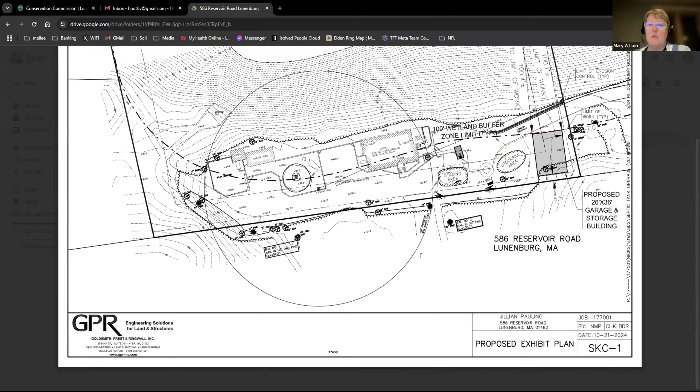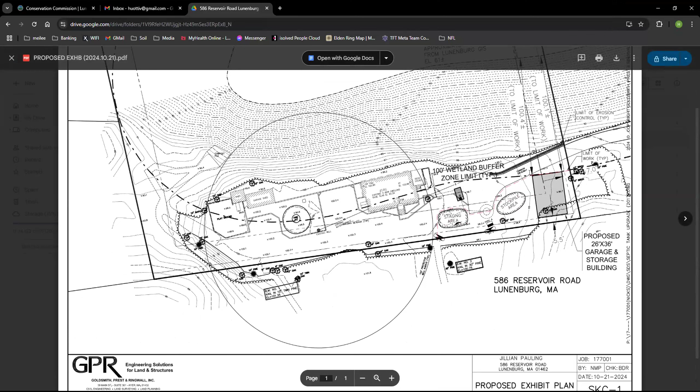So the subject site is an existing single-family dwelling, shown here at the top of essentially a hilltop that shares a common drive with the abutting property. The applicant is proposing to construct a new 26 by 36 garage slash storage building located right here at the corner lot. As you can see, this line right here is a 5-foot offset for garage building to the property line, and we have essentially placed this garage building 5.5 feet away from the property line, giving the contractor roughly 6 inches of play

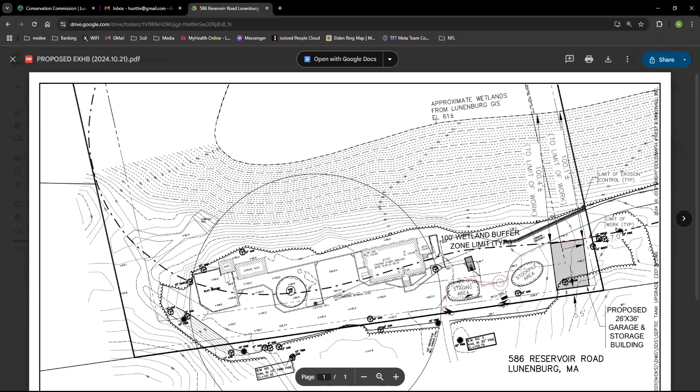for construction tolerance. In doing so, this new garage is set approximately just right outside of the 100-foot buffer to the large wetland area located down the slope on the northern side of the property. The building itself is set right outside of the buffer limit. Any staging as well as storage area will be done outside of the buffer limit itself. And we'll be installing erosion control on the down gradient end of the work. As I understand, during the site walk on Saturday, Bruce had answered most of the questions that you all had on site, but I'm happy to answer any more questions that you may have.

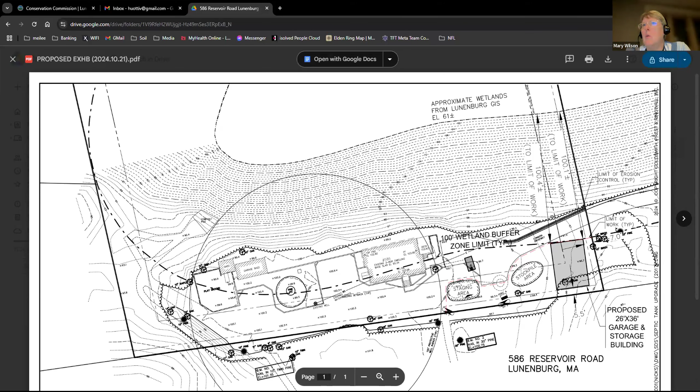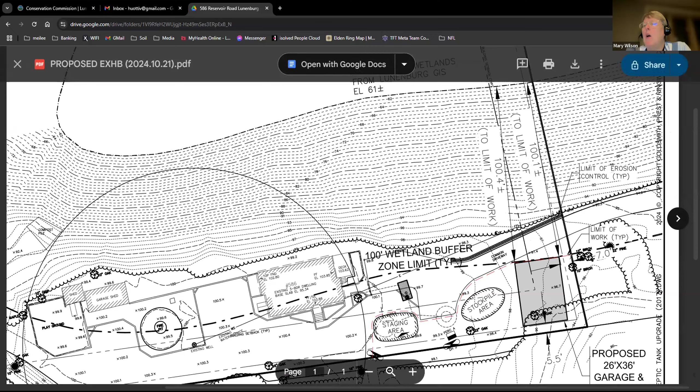Okay, thank you. As I understand it, there are 3 trees in that location that will have to come down, and those trees are outside of the 100-foot buffer zone. So I'd like to correct that mistake. There's actually 1 tree that's going to come down, not 3. This one here in particular. The 3 that Bruce was referencing are these 3, and they're actually placed outside of where the garage building is going up. Okay, thank you for that. But I also appreciate that you actually have that detail on your drawing. That's really helpful for us. I don't have further questions. I will open the opportunity for other conservation commissioners to ask questions.

And it looks like we don't have any questions from other conservation commissioners, which is a little bit unusual. Yes, Jenny. Where it's not in the buffer zone at all, is it even in our jurisdiction? It does look like it's outside of the buffer zone area. But it looks like the limit of work is actually inside the buffer zone. So I would say technically it is, but in my opinion, that's a gray area. I don't know if Rich has a different opinion there. He's the guy that's been around the block a little bit more than I have.

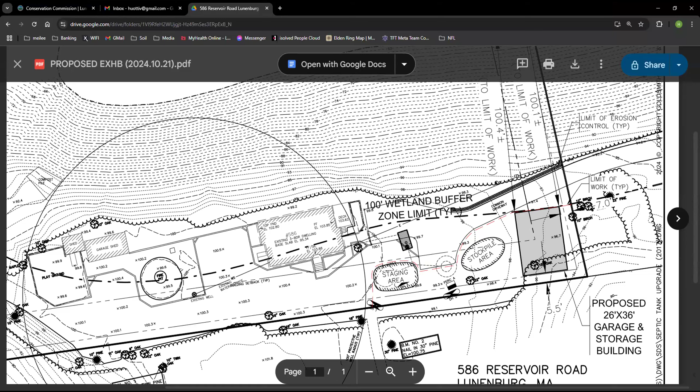And I was looking at the narrative on OpenGov, and you're right, they can't go behind, because it's only 5.5 feet, so there's not much area behind. Yep. So there's going to have to be stuff happening in the front. But the narrative says limit of work, stockpile, and staging areas will be located outside of the 100-foot buffer zone. So I don't know how that would be possible where it's right at the 100-foot.

That's a great point. I think the narrative is, I would say, incorrect. I think you're right, 100%. Getting access to the construction area, even just working on the building, is going to need a little bit of space right in front. Obviously, that's why we made the filing. But yeah, you're right. There needs to be a correction made to the narrative.

So, Tiv, would it be within your expectation that the limit of work would be expanded to be where the erosion controls are and looped around to be inclusive of the staging area and the working area around the staging area? Right. I think more specifically for the stockpile area, I don't believe that there's a whole lot of grading that needs to be done for the construction of this building. I would say that the grading associated with it is probably very minimal.

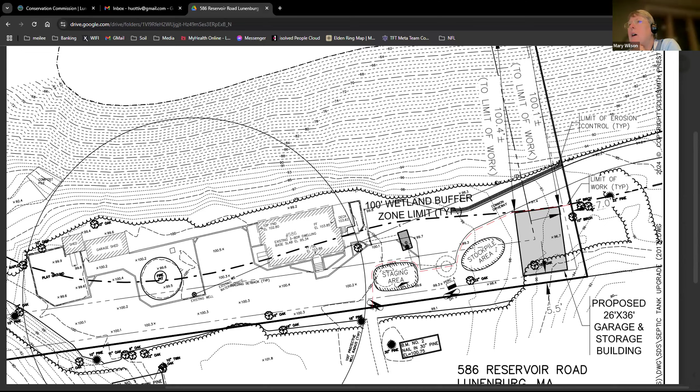And to my conservation commissioners, would you be... actually, Tiv, do you have the ability of marking this up? Yes, I do. Could you mark it up live right now and show us where you would put that limit of work? Let's see here. So it does show this red lining if you're following my cursor. It seems like that is being called out as the limit of work, but I think this line would actually extend to right about here and then wrapping down to roughly around here, and then closing in right there. That'd be the extent of it.

But even the staging area, presumably you're gonna have heavy equipment getting in there, moving trusses in and out or something, right? Mhm. Siding. Yeah. I'll tell you what. Why don't you get back to your team and revise it to where the equipment actually is going to move, and then resubmit that. Would anybody on the commission want to see anything different or additional or have any other questions regarding this, so that if we do continue it, they can come back with a fully complete proposal? Rich?

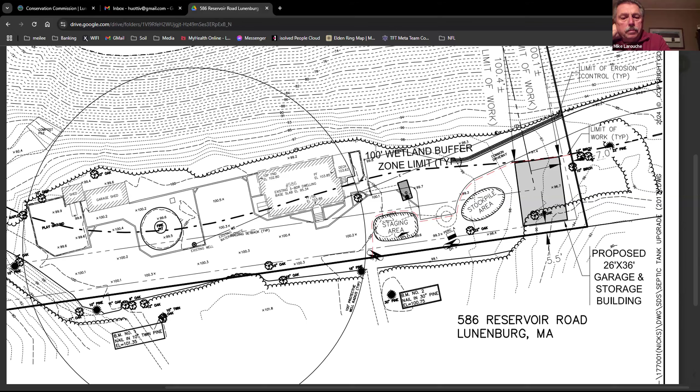Do I have a motion? So moved. Thank you. And do I have a second? Second. Thank you. Roll call vote. Chris St. Germain, aye. Mike LaRouche, aye. Rich Birsch, aye. Jenny Putherer, aye. And aye for myself. Thank you. Have a good night. Thank you.

I was just scanning our attendees to see for our applicants. I don't see any of our appointments logging on yet, so I think we'll move on to the next new hearing.

Pursuant to Mass General Law, Chapter 131, Section 40, as amended, and the Town of Lunenburg Wetlands Protection and Municipal Bylaws, a public hearing on a request to amend an order of resource area delineation by Christopher Anderson to remove a portion of the resource area delineation from the order due to maintenance performed on a man-made detention basin at 400 Leominster Shirley Road. And do we have that applicant and or their representative here on the call tonight? Yes. Bill Hannigan, Hannigan Engineering. Okay, thank you. Do you have plans that you can share with us? Absolutely.

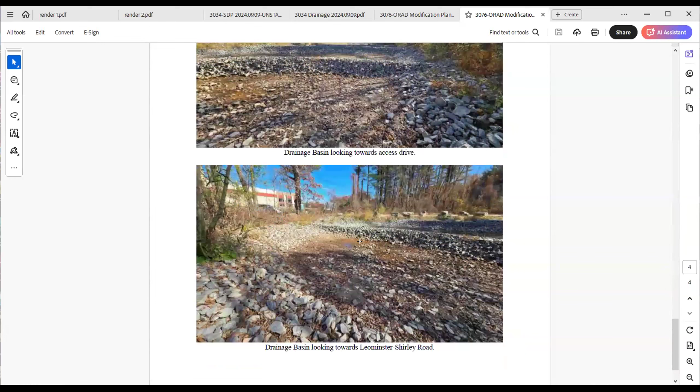And on the other side of the drainage basin area, right about in this location right here, if you can see my cursor on the screen, there's a culvert. And on the plans, that culvert is shown right in here. So their EPA requirement is that they have to test on this side of the culvert, the outlet of the culvert, every quarter, and provide results to the EPA.

Okay, so rebuilding of this detention basin or drainage structure, if you will, kind of basically eliminates this D series of wetlands. And the reason why we went out and walked it with Sophia, and when we looked at this area, when we filed our ANRAD, this area looked very much like this area, all overgrown with brush and brambles. And we did not know, and Keating did not reveal to us that was part of their operational system.

So when we went through and had this area delineated, the idea was, looks like a wetland. There's water from across the street, water from the street goes into a pipe, goes into another wetland. There's our D series. Well, now with the introduction of this structure into that whole area, or a majority of that area, this kind of takes away from that D series wetland falling under the jurisdiction of the act and of the local bylaw. So what we're asking is that the order be amended to eliminate the D series of wetlands, which would then be consistent with what the commission granted for the Keating people to build.

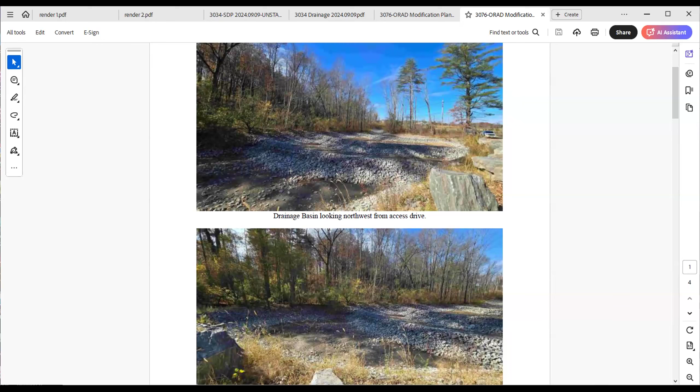So I'm just trying to wrap my head around this. So basically, Bill, the area you had surrounded in blue was a wetland, and you're trying to get it re-delineated as a drainage structure, so it would not have the buffer zone attached. Is that where we're going with this? Well, it's not that. We said it was a wetland. Yep. The commission, by issuing the RDA to Keating, essentially said it was not a wetland because of the fact that they allowed that drainage basin to be rebuilt under a -2.

So they even said in it that the work is not within the buffer, it's in the buffer zone of jurisdictional area. So the buffer zone, I would presume, would be from across the other side of the access path. Okay. So what we could do, if we agree on all this, is submit a new plan as a follow-up to basically take the D series off and redraw the buffer zones on the other side, so that plan becomes the updated plan for the project, so that we all have a record that we're working with. If that's acceptable, I think that would make sense.

And since I'm not going to get a chance to do a site visit, is it something you can present the draft with the changes you're requesting before we approve it? The change I'm requesting is to eliminate this. All I'm going to do is update the buffer zones to be relative to just this wetland system versus both of them. That's not really a significant change. This system will then have its own buffer zone coming around this way. But I could do the same thing as the previous one. I can get you the plans prior to Sophia issuing the amended ORAD. No problem with that. Okay.

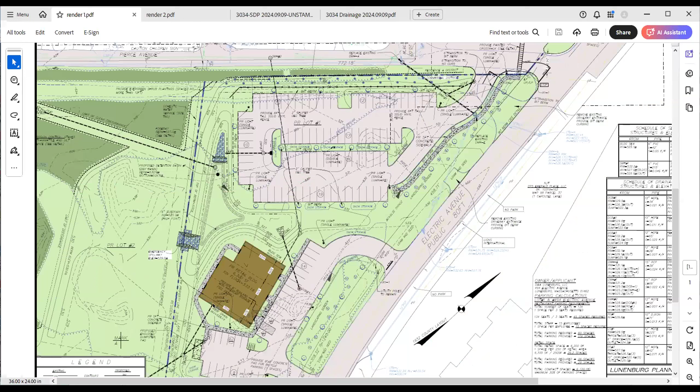The second part is that there's a proposed retail office building that would be constructed that would have its own separate parking lot off of Electric Avenue. The stormwater system would then drain to a dry detention basin in this location here with some of the stormwater flows coming from each of the parking lots. And then on the second page, the roof drain and one piece of the parking from this area here would go down into a grass-lined swale to an infiltration basin down in this location here.

Another set of piping from the detention basin would be outflowing here down to this channel that eventually gets to the wetlands. So the drainage analysis report once again shows that the peak rates of runoff are mitigated. It is partial redevelopment on the project, but I believe, and I'd have to check in detail, that the project meets the stormwater management requirements. Chris Anderson did most of the work on this one.

There is availability for building lots in here. The drainage system has been designed to accommodate the three houses that would be built in this area, along with their driveways and impervious areas and change in land use associated with that. So we've kind of thought ahead about getting that into the drainage system, so the calculations are appropriate for that in the future. But we're not proposing that work right now.

So DEP sent out some comments, which we've taken a stab at reviewing initially. There were really only three comments. The first comment was about the TSS worksheet, that the treatment trains include water quality units. The water quality units are within the drainage calculations, but they're not properly depicted on the plans. So we're going to update the plans to actually call out which structures have water quality units in them, so that the contractor will know which ones to buy.

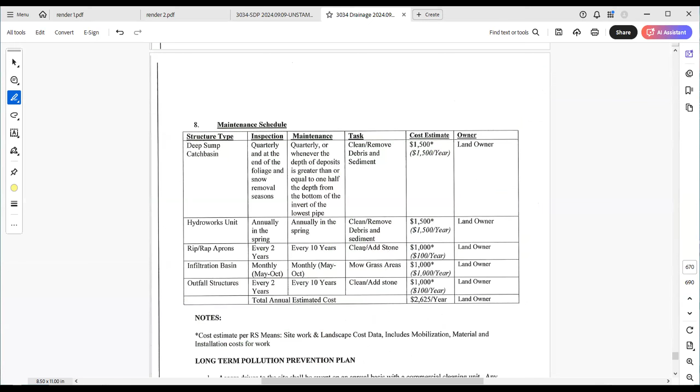And then the O&M plan, there's a dry detention basin, which is the detention basin towards the front of the site. This detention basin right in here, and we need to add a maintenance section for that, along with pricing or cost estimate of what it's going to cost to maintain that, and that's this table right here. We have the different units. We have the infiltration basin, but we don't have the detention basin, so we'll add that as well. So those are pretty much the comments for now.

As I stated, most of the work that is in the buffer zone is really related to this grading and this drainage system. When we do go back to build a house on this particular lot, wherever it may be, we would have to file a separate notice of intent for that work, because that work is not included within this filing. So that would be a separate notice of intent that would be filed, but the impacts from that are included within the overall analysis for the stormwater system for the whole project, as part of what we did in the drainage analysis.

So if you have a couple questions, we can kind of go through them real quick. But as I stated, we are anticipating requesting a continuance for this project. Bill, I'm primarily interested in the jurisdictional area, right? Which would be towards the western side of this parcel? Yeah. What brush cover, tree cover is going to remain, and what is going to be impacted in this proposed plan?

Well, under this plan right now, this is the limit of our work. Well, actually, this is the limit of our work because this is going to remain the same, but we do have impacts that are going to be happening in here, which we've included for the purpose of the drainage analysis, but not for the purposes of the notice of intent. Okay, so maybe what we could do is provide you with an overlay plan that shows where those areas are, so you get a better feel of it.

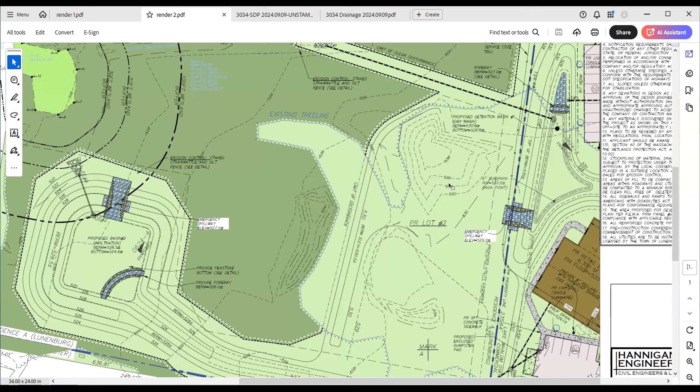Yep, limited disturbance, you can see. We have erosion control placed here. Now I can see erosion control around it here. Yeah. Okay, and then the erosion control comes in this way. So we have erosion control around all the areas that we will be disturbing, but we'll be basically building a berm in that area to basically push the water in the direction we want it to go as part of the drainage system.

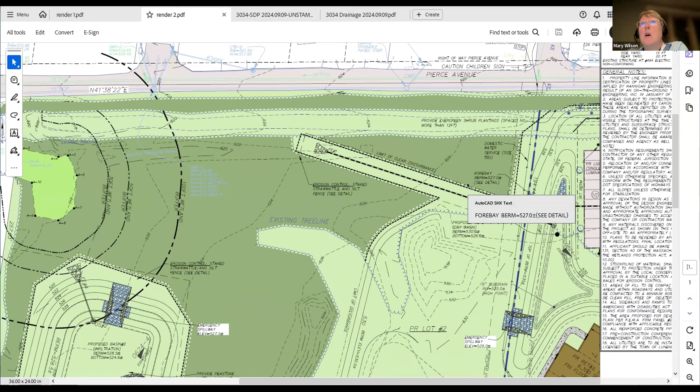Okay. Now, with that existing drainage ditch here, there's no work proposed in there? Not in this filing, no. One of the things I had noticed when I was out there walking the site this weekend is that the northernmost, where's north on this? North is... Okay, so the line goes northwest, right? Yeah. On the northwest side of the berm, for the drainage ditch, it looks like there's a lot of trash that's been built up in there, and so I wondered if that's just going to remain untouched.

We can clean that area up as part of this. I don't think there'll be any problem with you adding that as a condition, to clean up the trash in the existing drainage ditch. Yeah. And I think there may even be some trash areas along the outside of that as well. So this is apparently the old, I think it was part of the old F&L railway, like a railroad bed through this area here. So that's kind of littered with different things. He wants to clean it up anyways, but we told him we don't want him to touch anything until we get done with the process because we don't want him to get himself in trouble.

Yeah. So let's see here. I'm gonna try to, oh, it's not gonna let me do it. Can you see? You can't see my mouse on this. No. It's not as interactive as the ones that I use during my day job.

Where your mouse is, if you go up on the page to where it's dark green, and then follow that dark green along to the left, right? Mhm. All of that berm right there appears to just be trash, all kinds of trash with dirt mixed in, cinder blocks and construction trash. And so that was specifically the area I was thinking of. Okay, I thought you were talking back in here. Yeah, we were kind of talking around each other. But yeah, so that was my question. And it might be better if it's left undisturbed. But it was something that I certainly had noticed when I was out there.

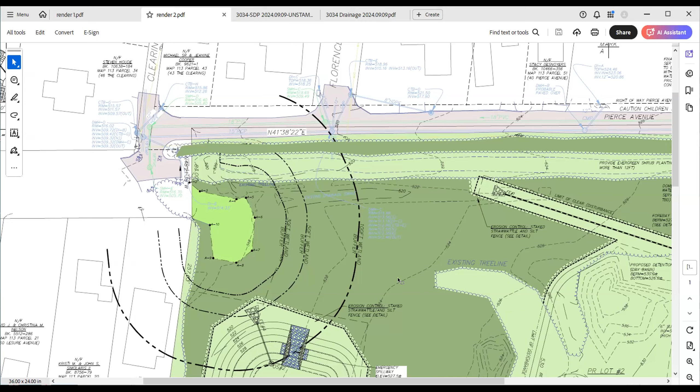Based upon the survey, it appears there must be larger trees and woodland type cover in that area. There definitely is, and it's pushed all in between. And I'm not asking for you to do anything. I just wanted to know what the intent was there. That's all. I think maybe not as part of this project, but I think the plan is for 3 single-family houses here, and as part of that plan, this would get cleaned up significantly and then most likely maintained by the landowners at that point in time. Okay. Thank you for entertaining that question.

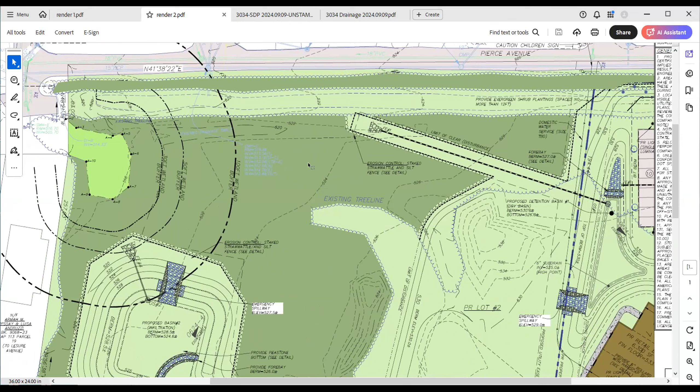Rich has his hand raised. Rich? Oh, hold on. Am I unmuted? Yes, you are. So it's not in our jurisdiction, but are they planning to do the parking lot and the commercial building at the same time? Yes, that's the plan. Okay. I just noticed that they didn't have the same entrances or any of that, so.

Yeah, I believe the intent is to build this one first and then build this one. They already have the desire to rent this out. They have interest in it already. I don't know exactly what his plan is. I think we'll probably find out more as we get through the process. But I know he wants to build the parking lot for the restaurant as soon as possible. He may do both at the same time. To me, it makes sense to prep the whole site at the same time, even if he doesn't build the building yet, and then he can come back. Okay, that's kind of where I was going.

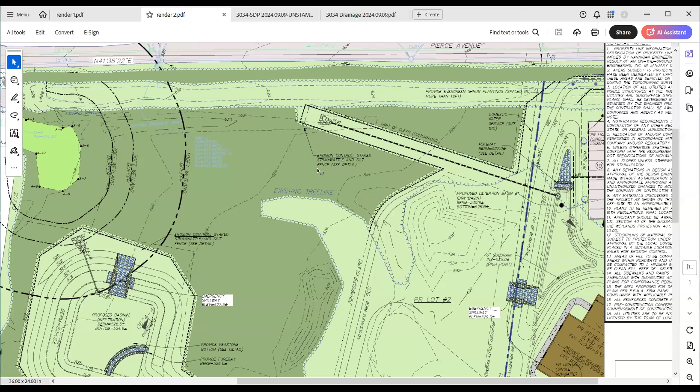To see if you were doing all of the wetland build out, even if they don't do the retail building right away. Right. Yeah, so I think what we can do is, between now and the next meeting, we can kind of take a look at it. I understand your question, because what your question is: is this going to get built first and then this not going to get built for a couple of years?

Okay. So it looks to me like the only thing really draining into this is this section right here. So I can talk to Chris about whether the overland flow from this area here is intended to go; looks like it's going to go this way anyways. So it may be that we don't need to build all of this until we're ready to build this. But once we start building

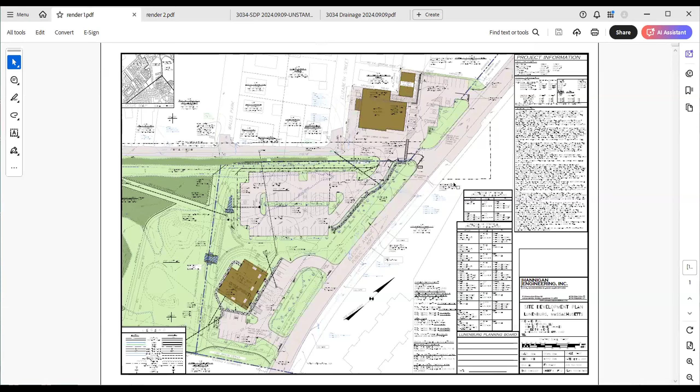from my perspective, from a construction management perspective, once we start building this parking lot, you got the site guys out there already. This sewer line has to come across here, so you're already kind of working in that area. You have to build this basin anyways to have the availability of drainage for this one. So this will get built. So I mean, it almost makes sense to have all the infrastructure in place, at least to this point, before you start building this area out.

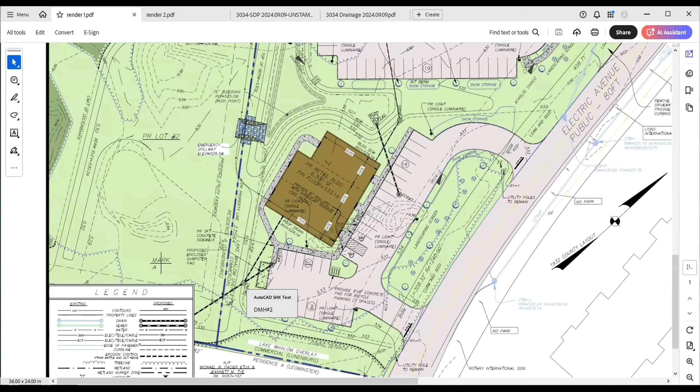And then from there, if they finish this basin and they finish this parking lot and they don't start the construction on this part of the site, there's really only two structures left to be put in and a roof drain. So from my perspective, I think it makes sense to put this stuff in probably up to the zoning line and then wait. And then when they go to build this, that's when they would build the rest of the stuff heading to the back. I think that would make sense to me. Okay.

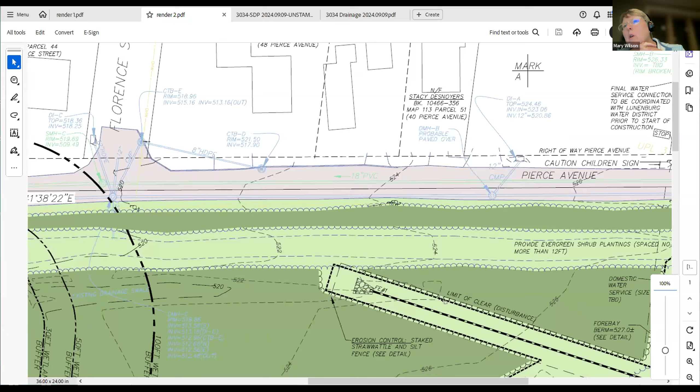Bill, where are the erosion controls going to be placed? And I zoomed in, you saw them. Yeah, right at the limit of work. Right, limit of work. That's the erosion control. Oh, okay. Is that straw wattle and a silt fence? I believe so, yeah. Okay, very good. Yeah, that note that you had zoomed in on said what it was. All right. Do we have any other questions from members of the commission? Okay, I'm not seeing any. Do we have any questions, comments from members of the public?

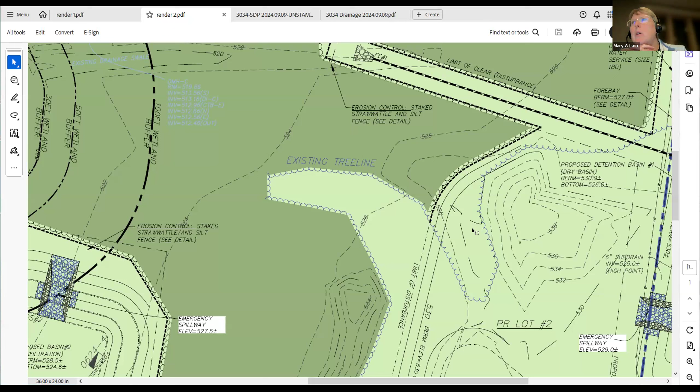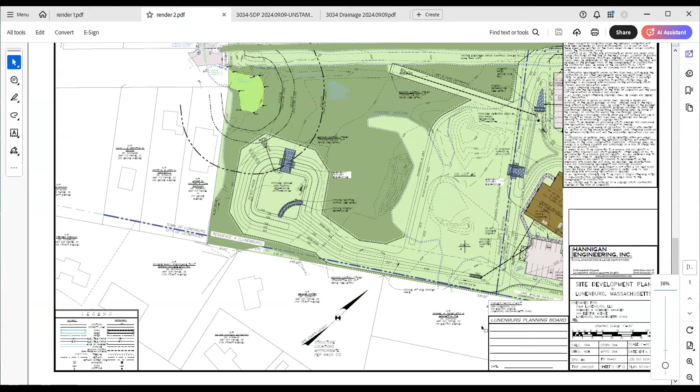Okay, Bill, I think you said that you were asking for a continuation? Yeah, I think it makes sense to let us get the peer review done, because if there are changes to the plan, then we can bring back and give you a revised plan that you can vote on, and then that revised plan will be the same plan for both planning and conservation. I think that makes the most sense. Okay, and so what date do you think we should be shooting for in terms of continuation? Our next meeting is the 18th? Yeah. Or do you think it's more January?

I think what we can do is, let me just, maybe we continue to the 18th, and if we don't have everything back by then, we can ask for a continuation ahead of the meeting at that point. Yeah, we can do that. And honestly, you can just notify Sophia by the 16th or 17th, right? And then even though we have you on the agenda, we can just announce the continuation, and our meetings in January are going to be off cycle.

They'll be on the 18th and what, 22nd? Is that right, Sophia? I think that's right. Well, you got one of them right. It would be the 22nd and the 8th, instead of the 18th. Yeah, I was looking at 8th. Oh, so the 8th and the 22nd, okay. But we have a request from the applicant to continue this to December 18th. Do I have a motion from the commission?

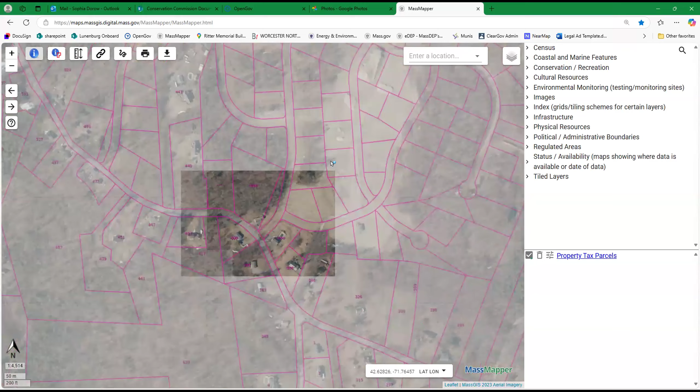So here's the property. Let me orient myself. This is where you come in. Correct. Usually we park over here. So Monday we walked a couple different ways down here. And this is where it starts getting really aggressive, and we noticed that Kevin put some new refreshed erosion dams, check dams or something, all the way down.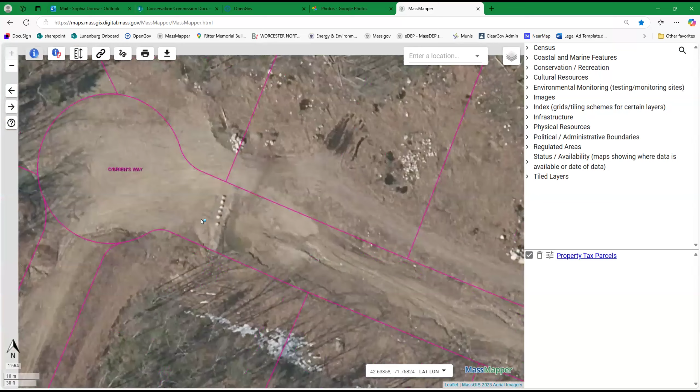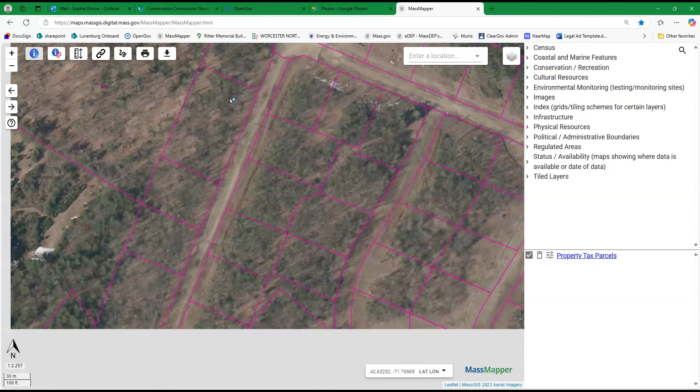And then there's like a basin that catches the majority of the runoff that's happening. But it's still bypassing that because it's not deep enough. This is kind of eroded away and it's just bypassing around and continuing down here. So if that's not addressed, all these check dams up here are kind of in vain because it just pools here and then overflows and continues down. And then I believe there were wetlands over here that the siltation was going into.

Hang on, slow down for a minute because there's like a delay. Oh, there is. Sorry. So where are the wetlands that you're identifying? Let's see. I believe in this general location, and that was quite some time ago that I knew they were there. Chris St. Germain was with me, and they were going down into that area where the wetlands are flagged previously.

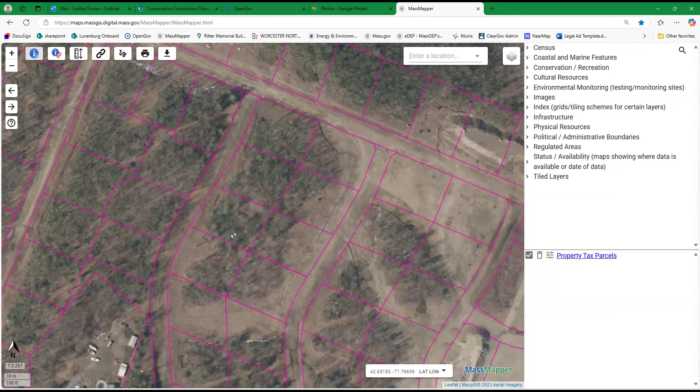Now slowly panning up this way. Another area of concern that we had not gone to until recently this week was this intersection here, where it mirrors the same exact thing as what was going on north from here, where all this open land just starts to funnel and create another crevasse-like channel that runs down. And there are the newer wetland flags along in here, in which the sediment goes directly through those flags. So not only within the buffer zone, but within the flags themselves.

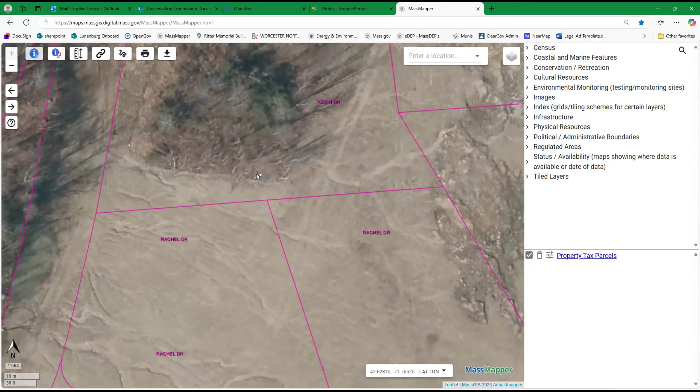And then furthermore, today we parked here and walked in. As you can kind of see, other various areas of sediment eroding down this way, down gradient into this location, and another one over here, and they're just kind of trailing off directly into this pond here.

Now I noticed that there were very, very fresh straw wattles and silt fences, a silt fence put up over here. However, it does not follow the wetland delineation flags. In fact, it goes through the wetland itself, which is not properly installed. So that's a concern there. I do have photos, and maybe while I share the photos, Chris can have more input.

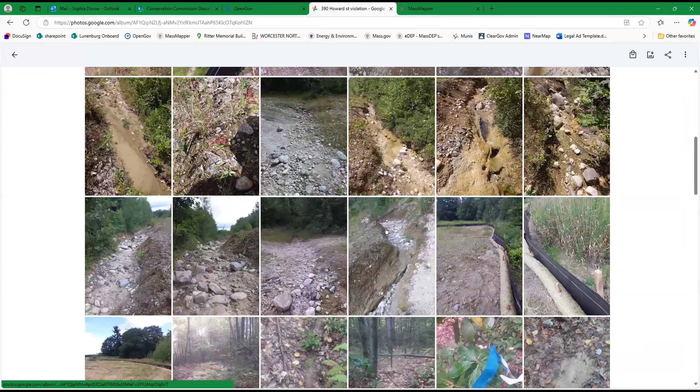Yeah, just basically echoing what Sophia said. So as we were walking down, I had never gone that far down that particular area, and we found some significant erosion. Like she said, it mirrors the original one, where it's a very steep downhill, and it just carries everything all the way down. So that needs to be addressed.

I find the property a little overwhelming in terms of, you know, trying to address issues. There's just a lot. Not really sure. I feel like I need more education in order to. I wish I was out there with the Ecotech folks. I would like to have a real expert out there to help me understand what can be done. I feel a lot of the issues are tough because there's so much missing forestation, and since the project hasn't started, the issues are just, you know, exponential.

Thank you, Chris. Sophia, why don't you narrate us through these photos? So this is the most recent erosion control. You could just tell it was really fresh, and there were still plastic ties left on the ground. But this runs straight through that pond area. I would say the wetland flagging, the blue flags, were probably like 20 feet to the left over here. So completely way off of where they're supposed to be. And I did notice on the opposite side of this silt fence, there was siltation in there already. So unfortunately, the damage is already done.

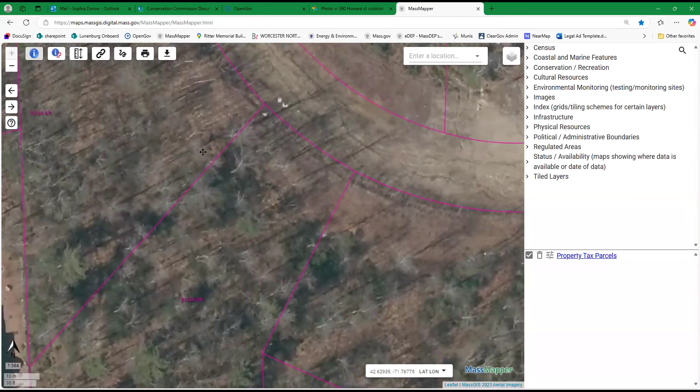Can you determine where that picture is? I mean, it's a 200-acre site, and you're showing a picture. Because I remember when we went out there, yourself, myself, Chuck, and one of the members. I'm sorry, I forget who it was. It might have been Chris. And we went out there, and one of the things we talked about was, you know, this keeps sitting and it just keeps eroding more and more. I mean, these areas that were dug out before in anticipation of eventually putting roads in, unfortunately, I've kind of screwed myself now because they're wetlands now, in roadways.

Where you started off when you started going down the hill out back, and you showed that area, let's say it's a little, what I think you called it, maybe a pond, and then it goes around that, and it goes down the road, and it goes out towards that little finger of wetlands that abuts, I believe it's Brackett's property. It had shown some erosion, but I thought out in the field, we had determined that was probably a couple of years ago.

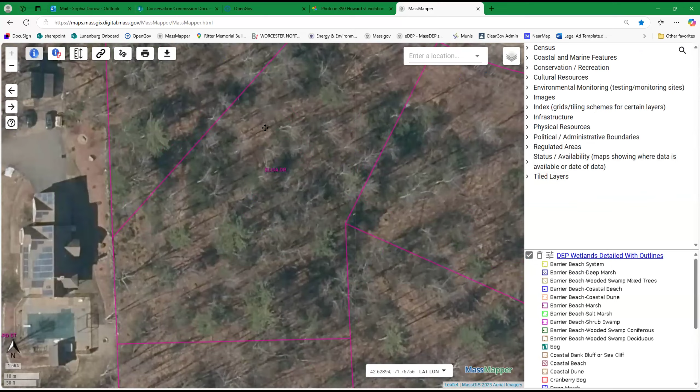Because if you look down that road, there's erosion, in some places it's 3 feet deep. So we know it's not sheeting off and going off onto the lot and out towards that neighboring property. I thought it was pretty much resolved when we were out there. When I left there that day, we were of the opinion that I was gonna go out and put the rocks in that trench out in the back to slow the flow. That's been the enforcement order that I've had on here for months. And I don't know if we can get rid of the enforcement order, because it's not even near any wetlands.

Everything you've asked me to do, the board has asked me to do, I've done. I just as soon go out there and build the thing. But this just keeps dragging and dragging, and I'm not blaming you guys. I mean, it's been my issue because I haven't been able to get my engineers out there to pick up the flags.

The siltation fence and everything that Sophie was just showing us is out in the front, which is the roadway coming in. I believe Chuck did the delineation, and then he said, you know, we should probably put the silt fence and the erosion control up, which we did. And now it's not in the right place because Art went out there afterwards and reflagged it again.

So if it's something that we're gonna have to move, by all means, we're gonna have to move it. But I'm not gonna go out there and do anything until, quite frankly, I get blessed by the board. Sophia, I think we're still waiting on you to show us where that area was. Yep.

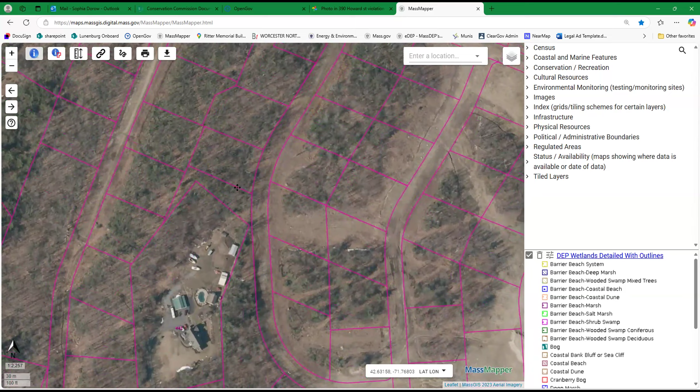It's further to your left. Yeah. Left. Yes. Yeah, there. Somewhere on that particular walk. That's where I would have thought. That's why when she was saying over near the Lotties, I can't, because I've looked at that and I didn't see any erosion over there.

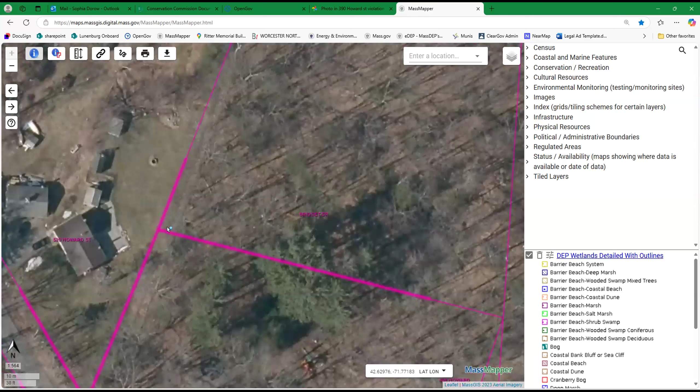So it's further out. It's further out where we walked down when we got our steps in that day, when we walked all the way down that gully in the back, and then we stopped and took a left and went down onto the right-hand side. That's where you're talking. Yes. Thank you. That helps.

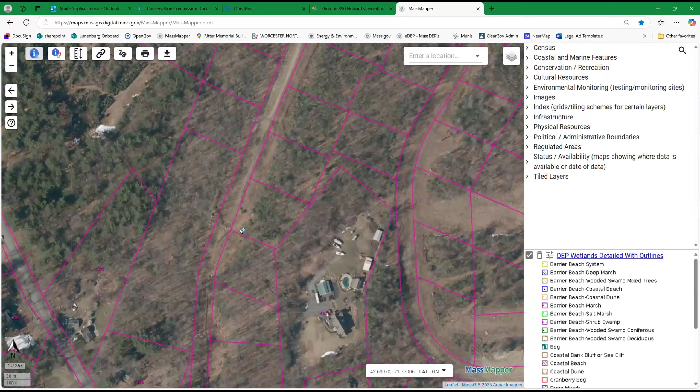Madam Chair, I'm all good with the location of it. Okay. Any questions or comments from other members of the commission? Questions or comments from any members of the public? Okay, I'm looking for a motion to continue to December 18th. So moved. Second.

Roll call vote. Chris, aye. Mike, aye. Rich, aye. Jenny, aye. And aye for myself. Okay, we'll see you again on the 18th. You will.

Yeah, and hopefully you could get those drawings to us as soon as you've reviewed them and approved them, to give us a chance to get out there with the renewed drawings as well. Okay. Yeah, I've got them to Chuck, so I'll check with Chuck again tomorrow and see that he got them instead of just relying on him getting them. I'll just make sure. All right, thank you. Thank you. Have a good night.

Okay, moving along. Pursuant to Mass General Law, Chapter 131, Section 40 as amended and the Town of Lunenburg Wetlands Protection and Municipal Bylaws, a public hearing to reissue orders of conditions for a notice of intent by Greg Roy of Dillis & Roy on behalf of John and Cathy Beals for the construction of an addition on an existing dwelling, porch, deck extension, driveway, and addition of a retaining wall. Proposed changes span the 30, 50, and 100 foot buffer zones of Hickory Hills Lake located at 12 Horizon Island.

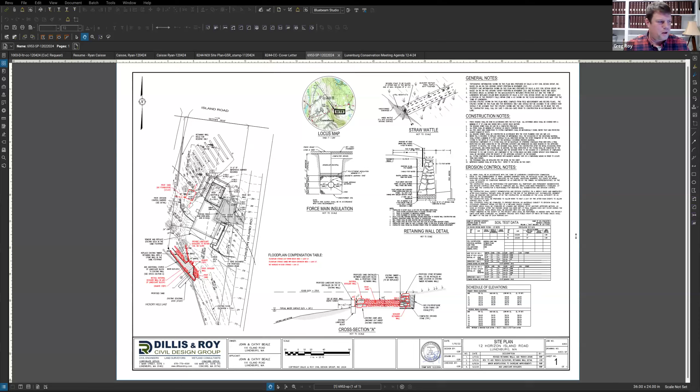Actually, can I share my screen? Yes, please, Greg. Okay, let me do that. That'll make life a little easier here. Bear with me. I'm visual. It always makes my life easier when there's a drawing. Hold on. I put the cart before the horse again. Okay, so let me zoom in here a little.

On or about the end of January or beginning of February 2022, so almost 3 years ago, we filed a notice of intent, which included the work shown on this plan in front of you, essentially. The major portions included a building addition on the northerly side of the building, some changes to the existing driveway, the proposed addition of a porch and some modifications to the deck. Also a proposed shed that we had up here behind the house. And we also proposed at the time some improvements to the lake shore. I'll talk more about this, but I'm trying to give you a picture.

I believe that the commission opened the hearing on March 2nd, 2022. The reason I say I believe is because we cannot locate the order of conditions for this project. So I have a memory of being before the commission, of the commission opening the meeting, closing the meeting. It was on a Zoom call, post-COVID. But March 2nd is not listed on the website as having even an agenda or minutes, and it's not on YouTube.

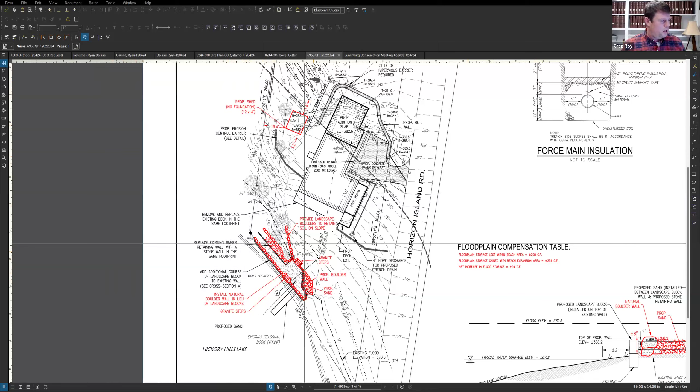Okay, so let me reshare and just briefly, again, I know it's late, I apologize. I appreciate you for sticking with me here. Let me just briefly go over what the Beals are proposing to do. And I think some of you were on site this weekend and maybe have a handle on this firsthand as well. But essentially, there's an existing beach area that's shown in this grayscale dot hatch area.

It's degraded, but it's a sand beach area nonetheless, and it's bounded by retaining walls that are shown in dark black here underneath the red line that kind of wrap all the way around. There's a staircase here, and then there's another retaining wall that wraps over here. Essentially, the Beals want to replace those walls with a new naturalized stone rock wall.

And so when we were here before you 2.5 years ago, we had a proposal where, my recollection is the objection that the commission had was we were actually intending to raise the elevation of the existing concrete block wall by putting another course on top of it and adding sand, which would have effectively created a fill of a floodplain area.

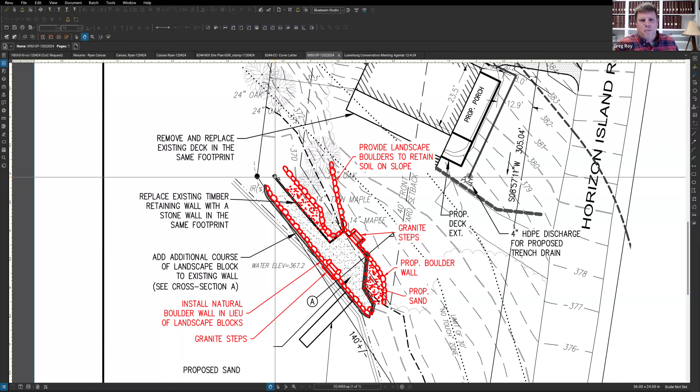And there just wasn't a way to get around that. And rather than dance around that issue, I think we were up against a construction schedule and possibly looking at losing a contractor if they didn't get moving. We just pulled the whole thing from the application. Now what we've done is revisited that, and I think we have a plan that meets the floodplain performance standards in the Wetlands Protection Act.

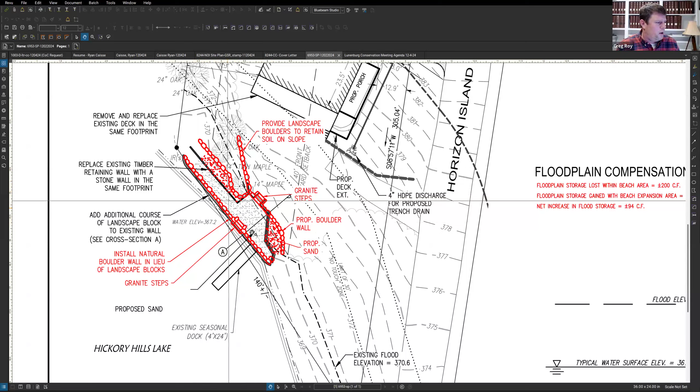What we're planning on doing is completely removing the existing retaining wall and actually moving it back, so giving some lake back. So we'd be constructing the new wall behind the existing concrete block wall, if you will. So there'd be a foot or two that's currently the retaining wall that would now be given back to the lake. So we'd be creating all of that extra volume. The elevation of the sand beach area would effectively stay the same, but we'd be carving out some additional floodplain compensation area just by reshaping this wall slightly.

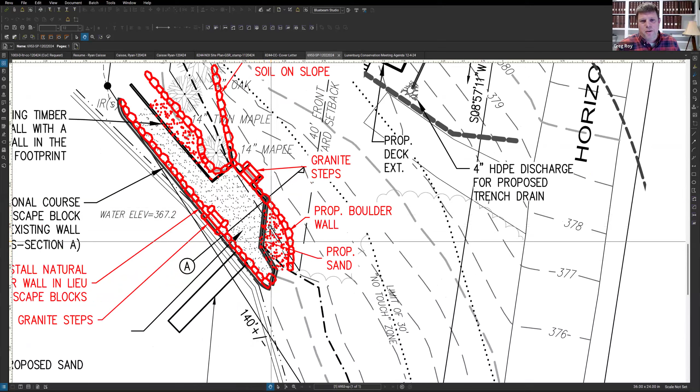And so this dot area would essentially be lowered from where it is now to the same elevation as the sand. So we'd be pulling out a modest amount of additional area here. And then the same thing over here when we redo this wall again behind the location of the existing timber. I think that's a timber wall. We would effectively lower the area right in this location here and add just a modest amount of additional sand there.

The only thing different, we added a line here. I think it was identified on the site walk that it might be advantageous to put a line of boulders in this location to hold back and keep soil on the slope, to avoid soil migration down into the area. And then the steps would be replaced with a more naturalized and permanent step in granite right here, but in the same location as they are.

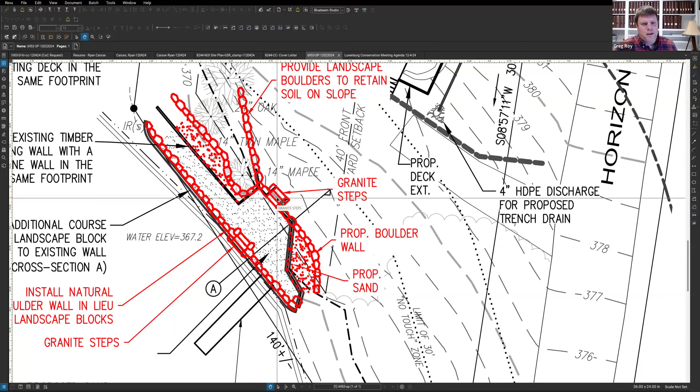And then, you can see here, we provided the floodplain compensation calculations. So we'd actually have a net increase in the floodplain storage under this plan, which again, I think is the significant issue that we would have had to resolve, that we decided not to resolve under the first filing and just pull it. But at this point, we're kind of trying to take the torch and revisit that concern that was expressed, and we're hoping that this proposal addresses it.

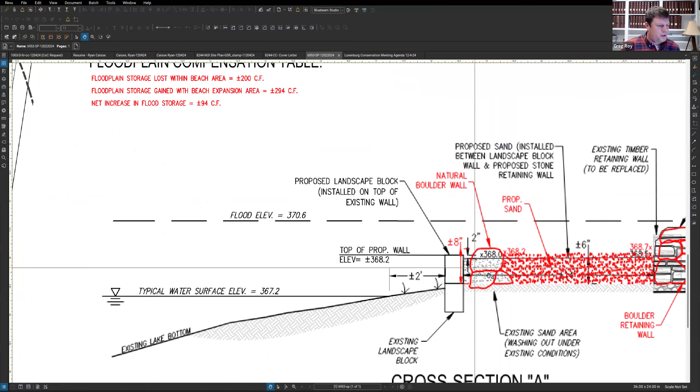So Greg, is the elevation of the boulder wall going to be the same as the existing wall? Yeah, you can kind of see. This doesn't do it really justice, but our intention is essentially keep things the same as they are now with the sand. The sand's a little bit higher than that wall, so we're essentially looking to, this kind of shows it.

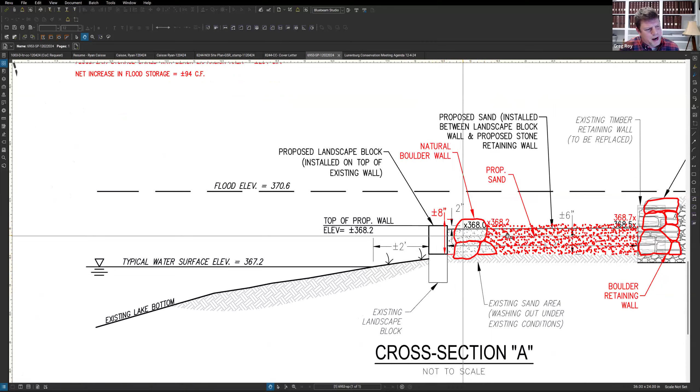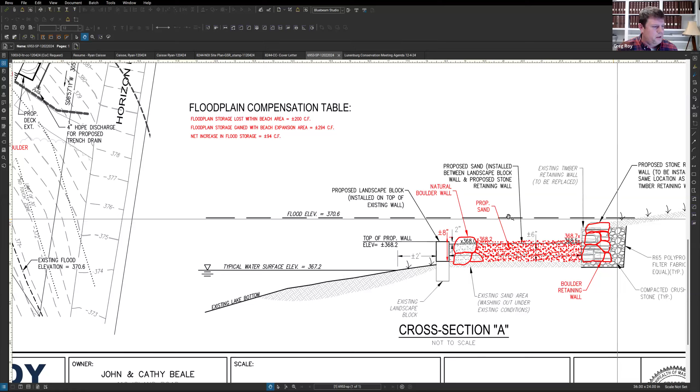You got that existing block wall, and we'd be placing the boulders further back from the lake. So you'd be essentially carving out all of that area times however long the wall is to create that additional floodplain storage. All of the work we're proposing is actually within the floodplain, if you will. So this dashed line up here is the floodplain in cross section. Does that answer your question?

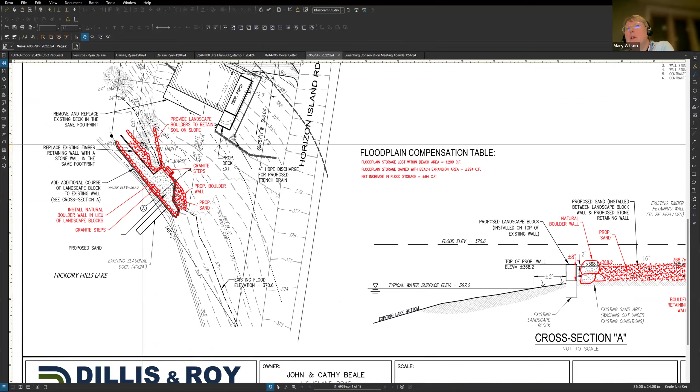Yeah, I think that does answer that question. And then I see that you're pulling the wall closer to that tree that's closest to the lake. Is that going to protect the roots? This one here? No, the one that's just below it. Below it, that's between the 14. Oh, and here, 14. Yes, in that corner.

Yeah, well, our intention is to keep the tree. We're not proposing any tree removal. Okay. So you're confident pulling that much soil around from the base of the tree is still going to keep the tree healthy? Yeah, and Cathy can correct me if I'm wrong, but I believe they are proposing to use Brett Ramsden for this work, a local stonemason. I think a lot of you are familiar with him.

And he's real good at working in these types of situations, particularly on the water, but also in areas where we're trying to protect vegetation and trees. So you can kind of see we curve that around. The intention is to save the tree. Excuse me, I did raise my hand. I'm sorry, Brett did say the trees would be fine.

And it is my understanding the wall might be a little bit higher. I don't think it'll be as much as a foot higher, but it's going to be a little bit higher than what it was to allow at least a decent amount of sand on that beach, because when you were there at the site, the sand that was soaking wet and degraded was the same height as the existing wall.

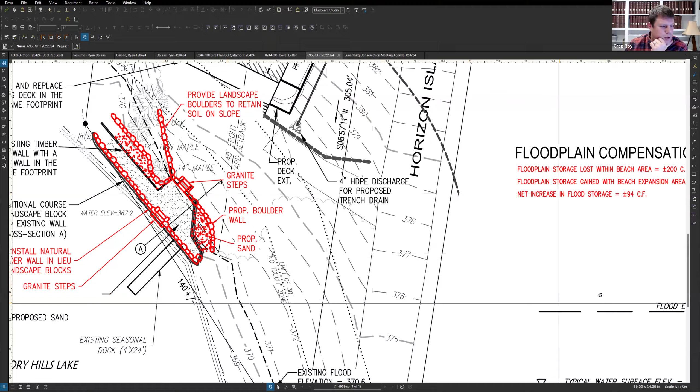That makes sense. So do we have to call out that square footage in the form? Actually, it's not even land underwater. We're showing the water surface. When we shot the water surface elevation, we don't have a date on here, but it was actually lower than the bottom of the wall. And we're going to be pulling that wall further back away from the lake. Yeah, but there was definitely a water line on that existing block wall.

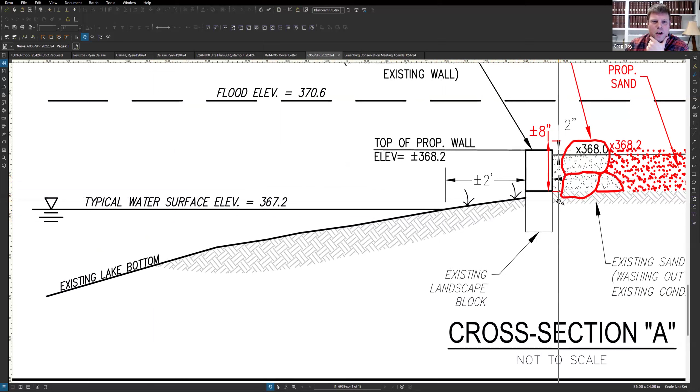Yeah, so it depends on when our surveyors were out there shooting it, right? This is a bad year when the water's up in this area. And if this is land underwater in this location here, we'll essentially be extending that back further, so we'll actually be adding land underwater. Okay, would you be working on the land side or on the drawdown lake side? Mainly on the land side. We will have to pull out these retaining wall blocks, so there'll be some temporary disturbance there, but we don't expect that to be a very long process.

Okay. From my understanding, from what I've been learning from DEP and working on the lakes, when I fill out those forms, that information is necessary even though it's temporary in nature. If you are working at all, altering, whether adding or removing anything in that area, it's something I need to put in to complete the form as a whole. So land underwater would be one of those things, square feet, and then obviously the bank, the length of that as well.

Yeah, I don't think we'd have bank here because it's an existing wall. So I don't think we'd have a resource area that would meet the definition of bank. And I guess we could quantify it, it's just difficult here because it's really not a disturbance in land underwater.

But we could quantify that for you. We probably did not refill out the Form 3. So that's fair, and we can do that for you so that we make sure we have those metrics. I think that's what you're asking, Sophie, right? You want us to fill out the Form 3 where it has all the resource area and floodplain metrics and land underwater resource area metrics. Yeah, exactly. We can do that. We intended to have the information and the plan speak for itself on that, but we could certainly fill out the form.

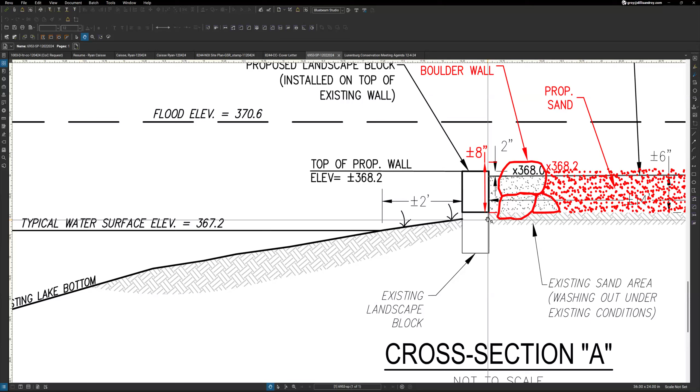Kathy? Yeah, this is John. Oh, sorry, John. That's okay. You got one, you got the other. Just to let you know, we have been in contact with Brett. We didn't call him until we had talked to Greg and we had done the search for the order of conditions, because we don't like to pull the trigger too soon. He is gonna give us a quote by the end of the week. We have to do the work during drawdown for obvious reasons, so he's kind of scheduling us for January. So that's our planned schedule. The lake's probably gonna come back up in the January, February timeframe, so we're looking forward to January. Yeah, and it's really only the lower wall that would be a problem.

So you know, and it's not a very, pardon the pun, heavy lift here for Brett. I think it's a pretty small wall, so I don't think it's going to take him a long time. But if he's going to be there in January, I think either strategy would work, provided we could get the signed order fairly quickly. It appears to be already drafted, so hopefully it's just a matter of getting some signatures on there.

I might suggest we do those. Well, I'll let you guys do that however you want. Maybe you sign those the old-fashioned way. That won't work, because there are commissioners that are not physically here right now. Okay, but if you wanted to wait until they physically came back into town... Well, no, I'm not suggesting we delay it. I'm just saying if you signed it the old-fashioned way, then the date isn't a problem. If you sign it using DocuSign, the date's going to say whenever you sign it. Yep, I understand.

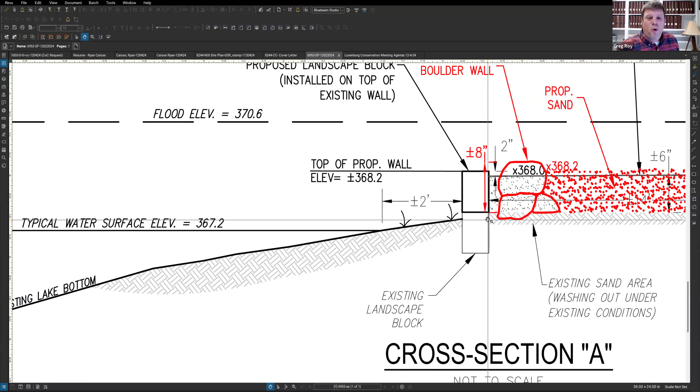So, well, either way, it doesn't matter. We'll get it recorded as soon as we receive it, and then, provided that's in time for the next meeting, we could be back with the metrics that you're asking for. Okay, so Rich, I acknowledge that you have a preference that we actually sign the existing order of conditions and get that filed with the registry of deeds before we amend it. And I don't have any issue with that. I don't have a strong opinion one way or the other. But I do want to make certain that we're documenting the right stuff.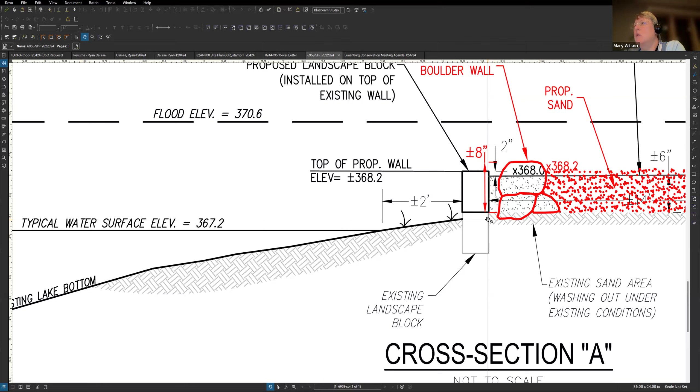Sophia, if the commission approved the existing order of conditions tonight, how quickly do you think you could get that loaded into DocuSign? You think that's reasonable to have done tomorrow? I could try my very best. It depends how many interruptions I have. I mean, I can do it tonight, Corey, if you want. I have DocuSign. I think I would have to manually recreate it since we only have the physical copy and a scanned PDF, and I can't create an editable Word document because I don't have the capabilities. So I'd have to recreate it and then send it via DocuSign.

So here's what I'd suggest, and again, you can take this or leave this, but if you send me the scanned, choppy, crappy looking document, I will fill out the form for you and send it to you so it's done. You can just cross-check it. I'll send it to you in Word. Would that help, Sophia? Yeah, that would be extremely helpful. We'll get that done as soon as we can tomorrow. We'll send it to you in an editable Word document. You can cross-check it yourself and save you some time.

Okay, so that leaves it up to the commission to do the signing. Yeah. But I will need to get a copy. Someone will have to email me a copy of that. I don't have a copy of that. Sophia, can you send a copy to him? Yeah, I can do that. Okay, excellent.

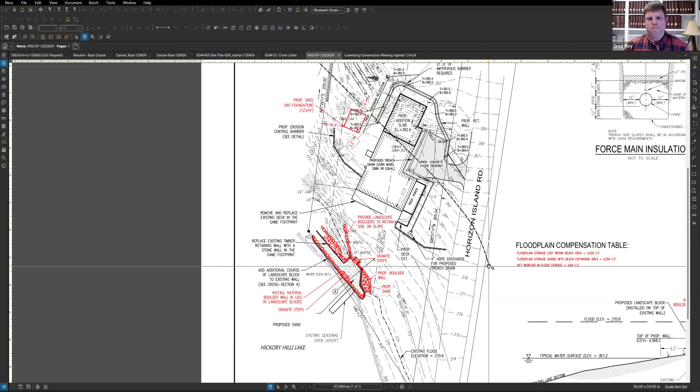Thank you very much, everybody. I know that's a confusing one, so we appreciate your willingness to work with us on that. Thank you so much. Yeah, and hopefully it'll be not as heavy a lift at the next meeting. Awesome. Thank you, everybody. Have a good evening. You too. Okay, moving along.

And just as a heads up, we lose administration support at 10 o'clock. We have 15 minutes roughly to go, so we're going to have to prioritize our time. And some administrative things I may do after Sophie drops off, but

Sophie, what do we have in terms of certificates of compliance? Need to start at 57 Round Road. Yep. So 57 Round Road, there were a couple things that were a little concerning. I don't think that this should be approved based off of what I've seen. So there's a driveway that exists currently that hasn't been removed, but it was part of the whole plan approval that it would be removed and loamed and seeded. So that impervious area hasn't changed.

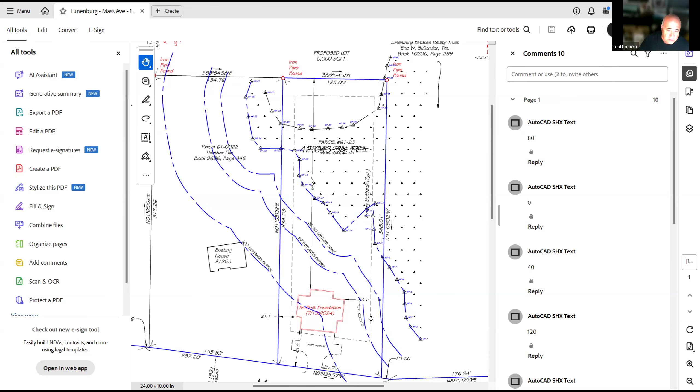And he wanted to leave, as he had promised, the 50-foot zone alone. Probably should have come in for a de minimis change, but apparently he didn't. So hoping that the commission can consider this at least a de minimis change. Now, I'm going to just stop my share for a minute. I've got some photos I can show of the site that were taken about 10 days ago.

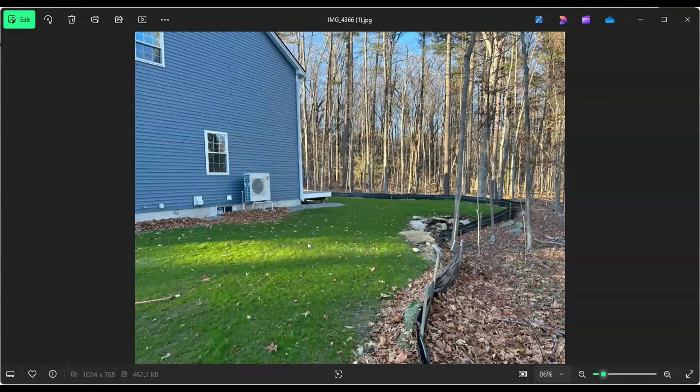Sophia, you have your hand raised? Did you find the photo? Yeah, I did. Okay, we'll just have Matt share. This is where the retaining wall is now. You can see that the sides of the area and the grass behind where the deck is, looks like a platform deck, has started to grow in very well. It's growing in on the sides and the back pretty well.

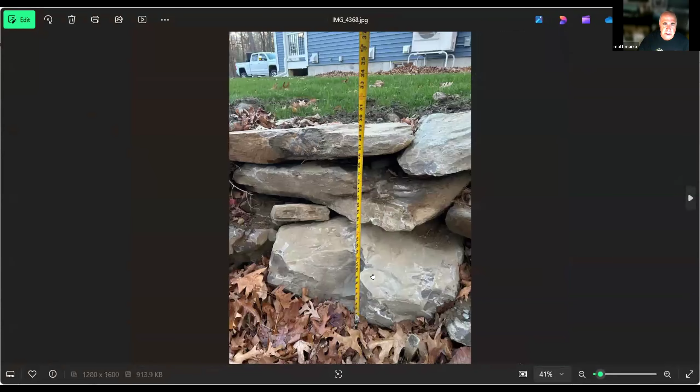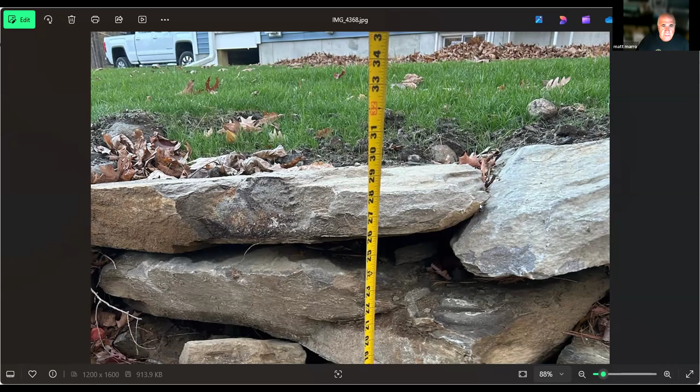Here's a side view of that little wall. There's a measurement here that shows it's about 29 inches high. We'll say 28. So it's about 2.5 feet in height. So the area that was planted was in the front. When I filed the original request for the COC a month ago, it had just been planted in the front.

And I do believe that I have pictures that Sophie could probably share from the portal that I had uploaded, or she may have her own. I have one more picture to share. This is it right here. This is when the area was planted back in mid-November, a few weeks ago, and the reason why it had waited so long was because they had a delay with the water main project.

There was a ton of temporary water line, and DPW was doing a lot of work in this area. But this is the commission's total discretion, obviously. But the reason why, as I showed on the plans, which I did upload to the portal this afternoon, I had to have the engineer go down, locate that wall, and then get me the plan, which he did.

The reason why he didn't want to do that was because he left the 50-foot zone alone. So what you have now is essentially, minus that small section of wall, it's only a couple of feet high, some area of grass on the outer edge of the buffer zone that needs to finish growing in. You've got an area that the house, or the duplex, has been built in accordance with the order.

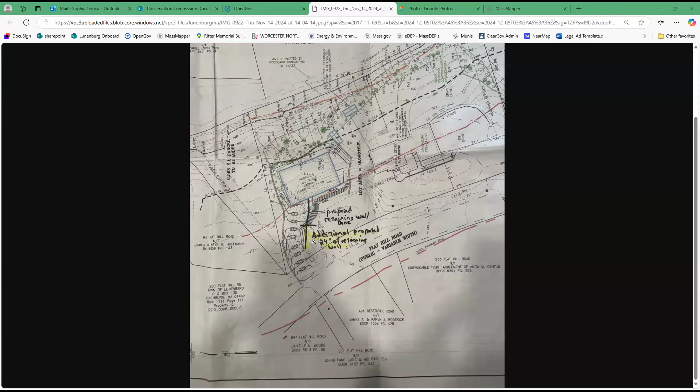Okay, do we have a plan that we can look at? Yep, Sophia should have all that stuff. It's in the yellow highlighted area. If you look at it, there was already about 25 feet put in, and from the line drawn horizontal, I highlighted in yellow an additional proposed 24 feet of retaining wall. It might go up a little bit further. Again, it's just their 5-foot block, so wherever it ends.

Okay, and how tall is the retaining wall? It's as high as it is. It's not going to go any higher than what it is now. It's only 3 blocks high. And how high is that? I think they're 2.5 feet high, so 7.5 feet. Okay. And then I'm gonna put a 2-rail fence on the top. I already have that sitting off to the side. I've already purchased it. I'm just waiting to dig the holes, whether I'm gonna go up another 25 feet or not with it. But I think that also comes into jurisdiction of the building department too, if you're building a retaining wall that's taller than 4 feet.

So, the building inspector was already out there and approved. I'm already done with my building inspection. He's approved it. And he actually asked me why I didn't run the retaining wall up further and end it flat. And I'm like, I didn't want to overstep my boundaries. I'm just trying to help hold the banking back. And I approached Sophie and she says, maybe we should run it through the board and everything. And I said, okay. So, here I am.

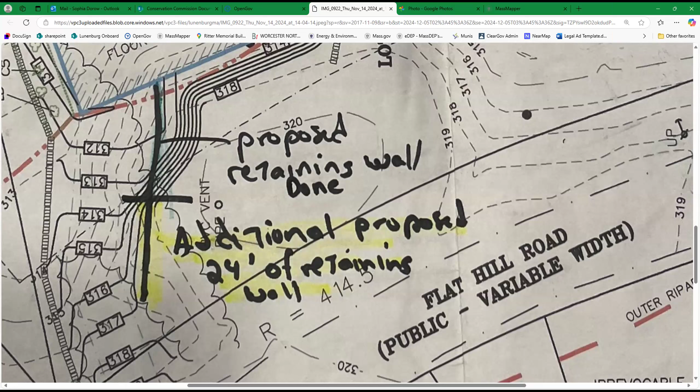Oh, Rich, I didn't hear you. Okay, Jenny, aye, and myself. Did you hear me the second time? I think I heard you. You said aye, right? Yeah, I was unmuted. All right, perfect. It was getting truncated for some. Mary, you're on mute now. You went mute. There you go. Yeah, I don't know how that happened. Weird. But thank you for saying it out loud, Chris. Otherwise, I would not have known.

Okay, unanimous approval for that project change. Thank you. Have a good night. Thank you. Okay, so it is after 10. We have one other person on. Maggie Van Sickle, you're here for what discussion? We are, this is Melissa Candavino. Sorry, that's my daughter's Zoom account. We are 67 Island Road. We're the last ones on the list. Okay. And what is your update?

So I'm working on submitting the RDA, and we have 2 out of the 3 documents we need. We're just trying to finalize the site map plan. And then we should be able to have that completed by the end of the week and submitted. Okay, thank you for that update. I really appreciate you acknowledging that you thought you would be farther along by this stage of the game, but coming to the commission and providing us an update on your status.

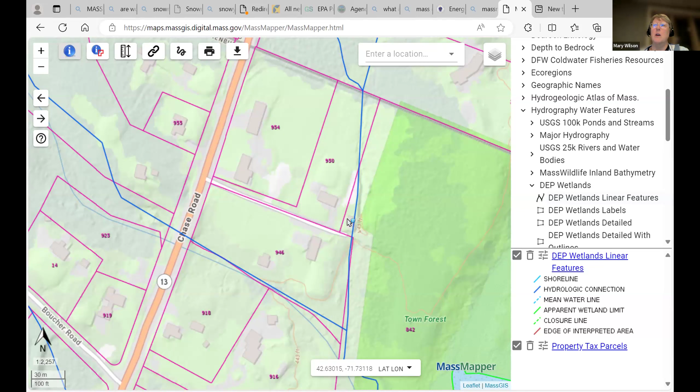So now it's incumbent upon the town to determine if they want to litigate or if they can have the owners take some responsibility for this encroachment that was disclosed at the time they purchased the parcel. And I have talked to the chair of the select board, and his guidance to me is that it's really not within the Conservation Commission's jurisdiction to obligate the town to litigation. That really is the charter of the select board.

So if we feel this needs to be escalated to be considered for litigation, we need to discuss that here and refer it to the select board for consideration of further litigation. And my own thought about this is, well, I'm sympathetic with the owners that have inherited this problem. It appears to have been a disclosed problem and an encumbrance when they purchased the property. So I'm sympathetic, but I also am very clear that the town did not create the problem, and I'm reluctant to let the town bear the full burden of taking the barn down.

And the barn would need to be taken down. I think Bob had gotten some estimates on taking it down. There were informal estimates, but the best guess that Chris Ruth was able to come up with was somewhere in the neighborhood of $9,000 to $10,000. So anyway, I'm myself, speaking as one commissioner, reluctant to have the town incur the cost of tearing down that barn that was put there through no fault of the other members of the town. Any questions or comments there?

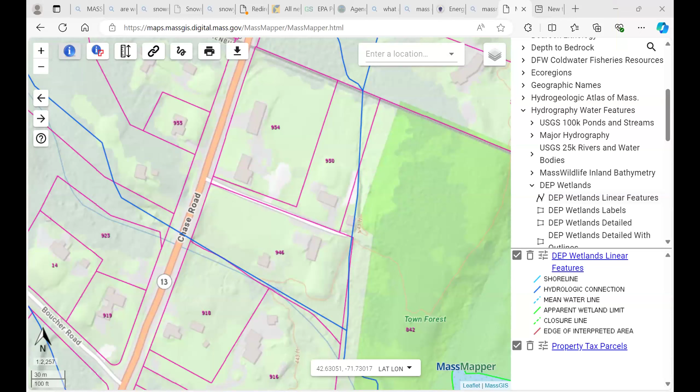Hang on though, Rich, you started out with refer it back to the select board, but then you ended with a recommendation not to litigate. I'll strike that last sentence. Okay, so you're making a motion to refer it back to the select board for them to decide whether to litigate or not. Correct. Okay. And Chris, you second that motion still? Yes. Okay. All right, roll call vote. Chris, aye. Mike, aye. Rich, aye. Jenny, aye. And I for myself. Okay, so we will refer that back to the select board for their consideration.

Okay, folks, how much administrative stuff do you want to go through tonight? You want to try to take a stab at doing it as fast as we can and getting out of here, or do you want to? There are one or two things that I think we do need to cover, but I would consider doing an abbreviated rest of the agenda. Yeah, I have an early morning, so I'd like to get out of here as soon as we can. Okay. Madam Chair, yes, Mike.

Until we have a new plan in January with Michael Ray, I still feel we need to do our attempt at keeping 123 Hollis Road intact until then. Absolutely. There's no change until there is an approved change. Okay. So I wanted to address that maintenance that I think we should do before winter sets in, as we've done in past years, to approve funds to have Cam's Heating go in there and service the heating system before winter. And we may need to approve not to exceed $400 for that service, and I can work that out with Chris Ruth to make sure the invoice comes in to him and he pays it on time. So moved.